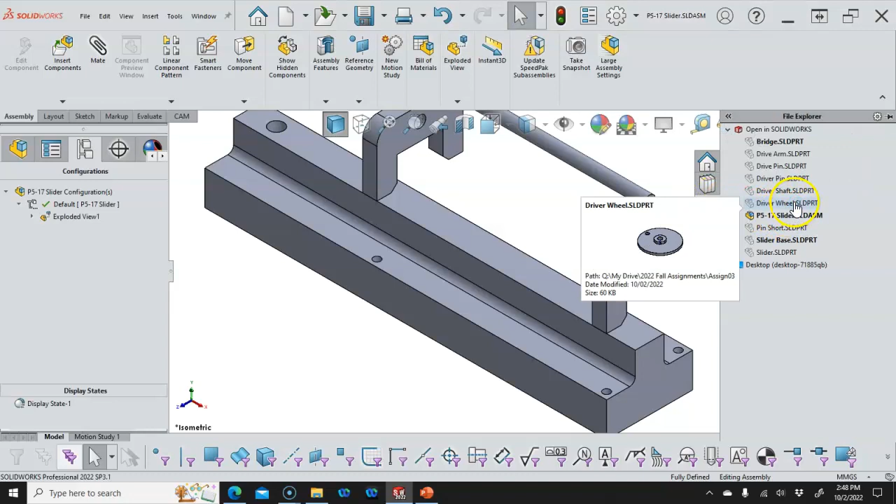Let's see if we can go pin short. Will it drag in? That looks like it grabbed a little bit of everything, so be careful with those. Yeah, no, I grabbed everything.

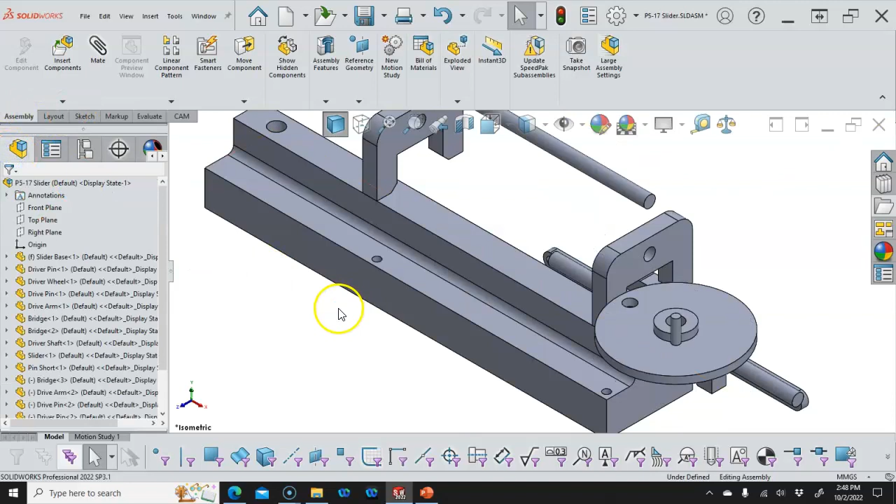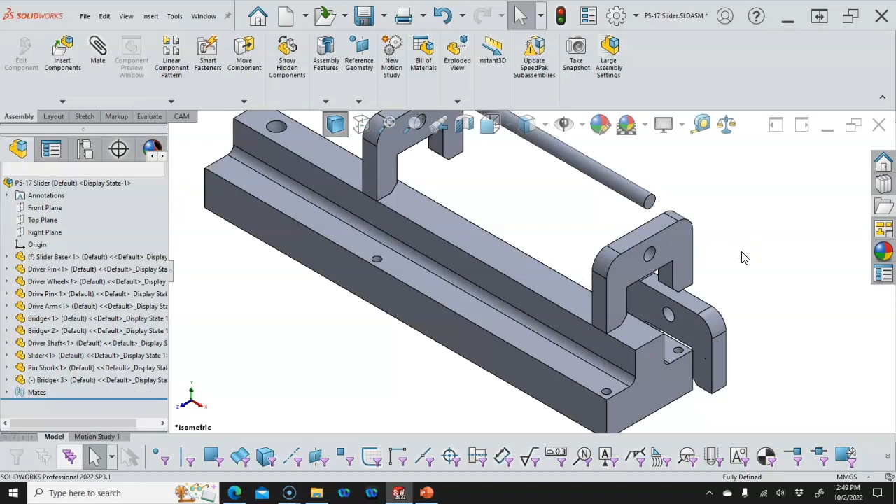So I'm going to try control Z, and we'll walk back out of this. But it brought everything in its created state, so at least that much is visible.

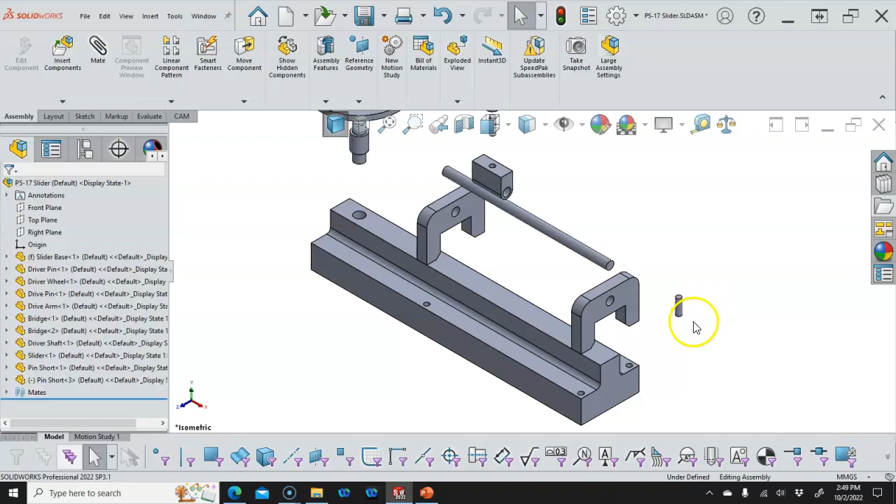All right, we'll try that again. So if you're in the open, and when all I did, well, no, everything blinks, so I'm going to try one more time. Okay, so even though it's not open active, it is active in memory.

So we'll go concentric and distance. So we made those 5 deep, so it should be, and that's still going to be the issue when we look at

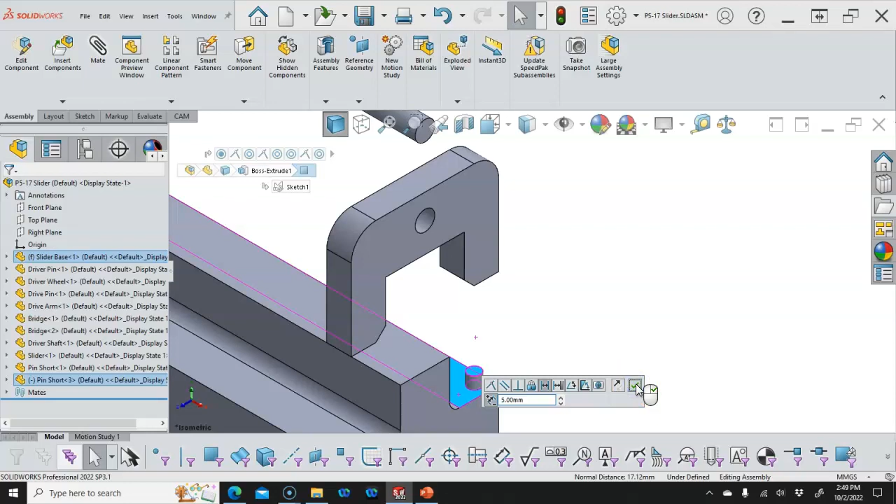this guy. All right, so from here, let's. Well, that one was actually 10 millimeter, wasn't it?

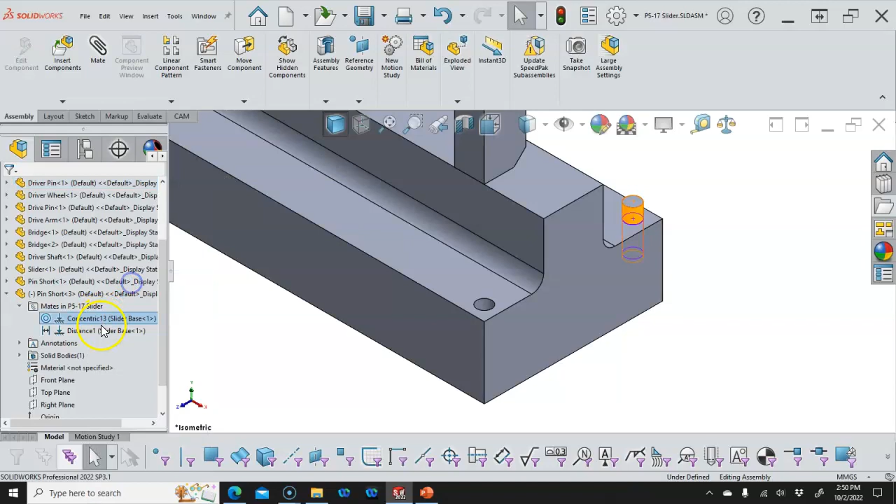So let's go back into the mates, and I will lock the rotation. Should be able to double click. If I can see the distance. No. All right, we'll just edit the feature.

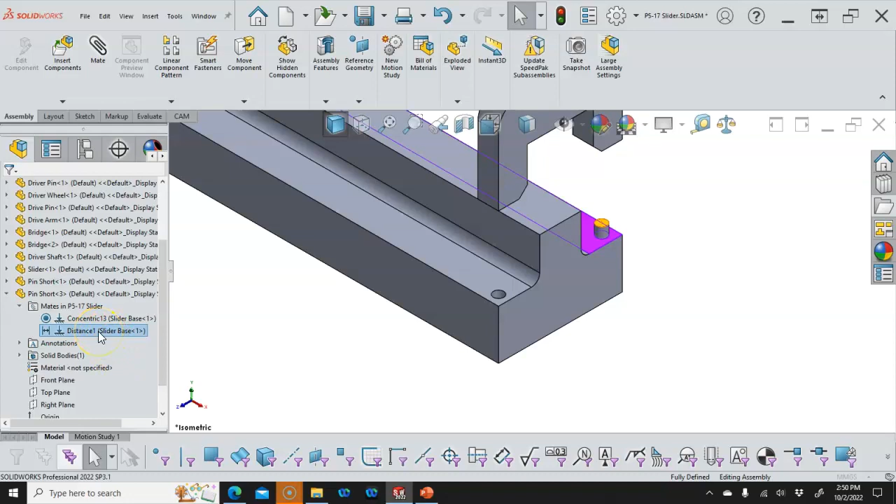And 8 will raise it up a little bit, it being 10 deep.

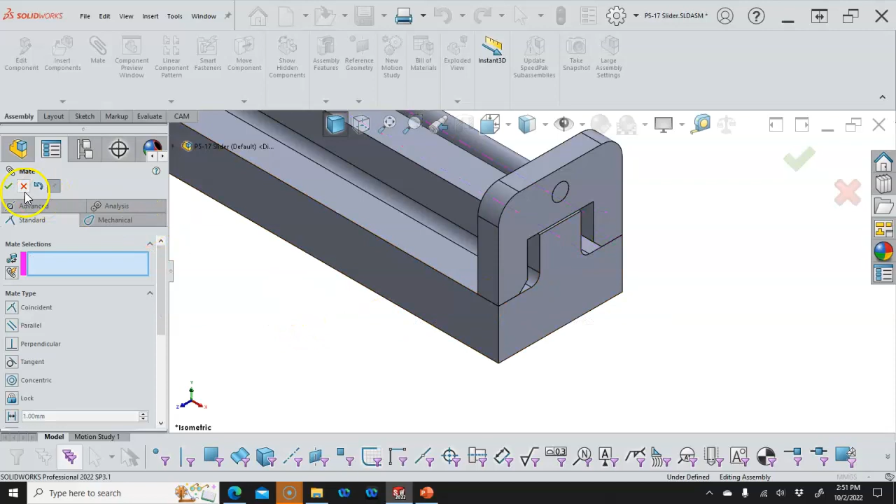All right, so the exploded view went away for the mate. Let's see if it stays. All right, well, a little easier, but we're not always going to have an exploded view to work from, and I don't know that that is the safest.

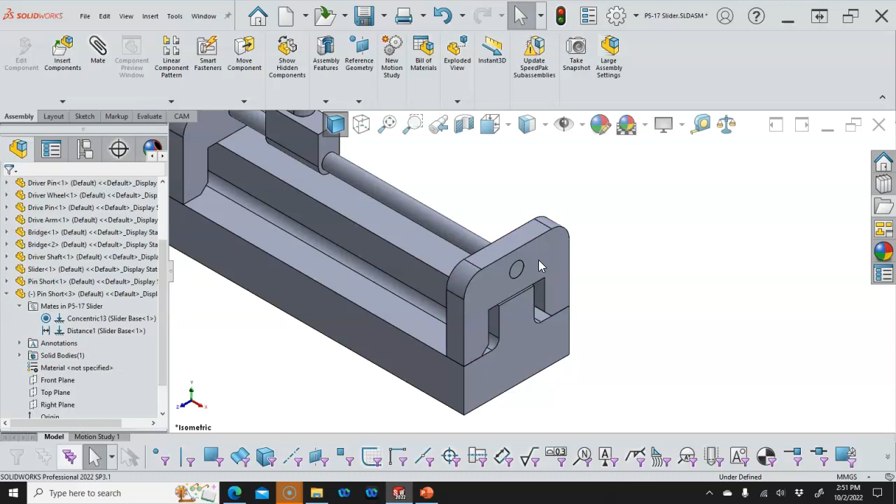So what we can do is hover the mouse over top of the part, hit tab, and if you want to bring it back, then it is shift tab on the keyboard. So tab, shift tab, tab, and shift tab.

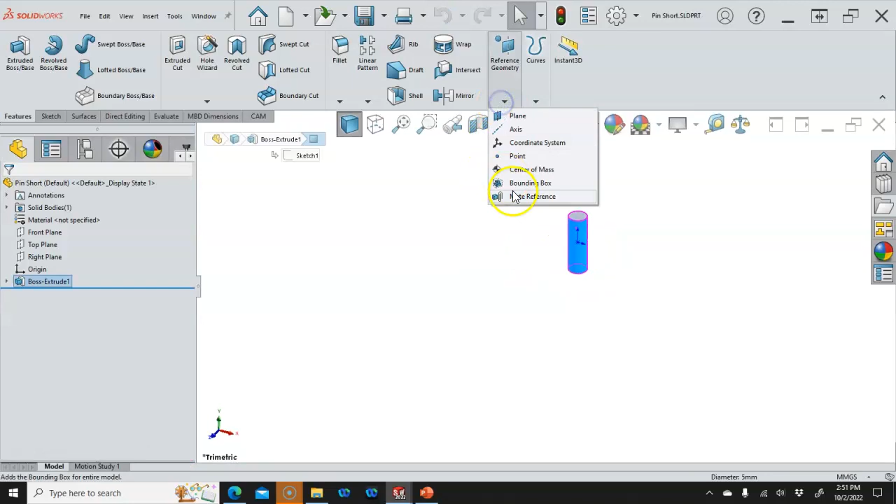All right, and then I would like to go ahead and open that one. We'll open up the pin, and instead of grabbing the edge for this mate reference, I'm just going to use the cylinder.

And not tangency, we'll go concentric and any orientation. So when I drag in from the work area to the next one, it should snap.

Okay, so it's there, it's just above it, and then if I hit tab, it's going to reverse. So if I let go, I let go of the control too soon. So let's try that again. I'll let go of the mouse button. Okay, so there's the lock rotation.

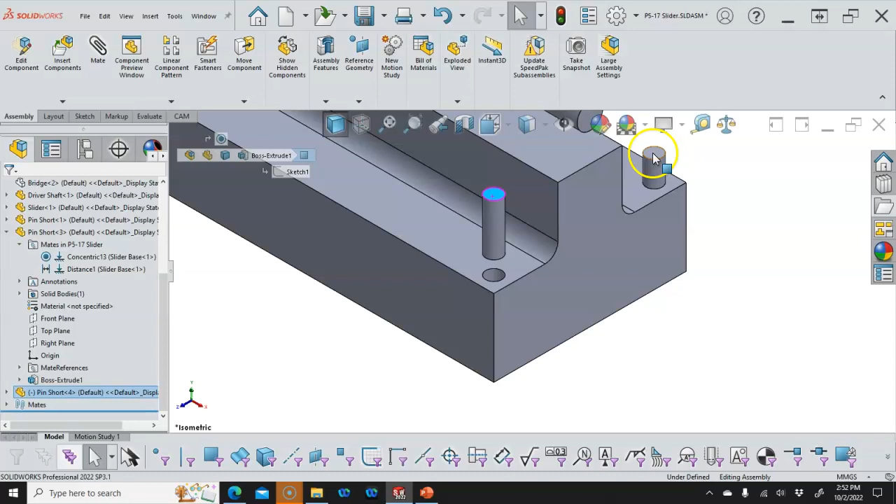It's fine. And then I would like one controlling the distance, so I'm going to make those coincident so that any of the changes I need to make will go into that one. So drag and drop.

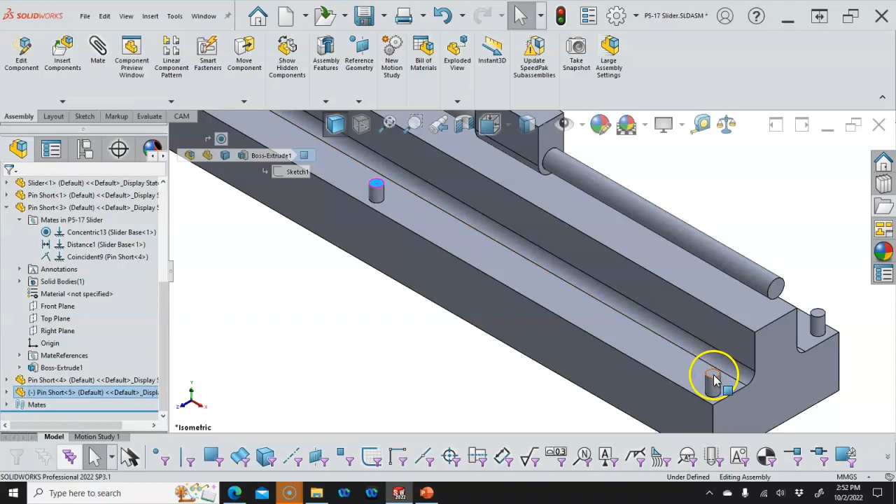We'll click the lock rotation, hit OK, grab the top faces and make those coincident. Rotate around, and one more.

Now this isn't going to be in the, there it goes. Got to wait for it to show the symbols. Lock the rotation, okay.

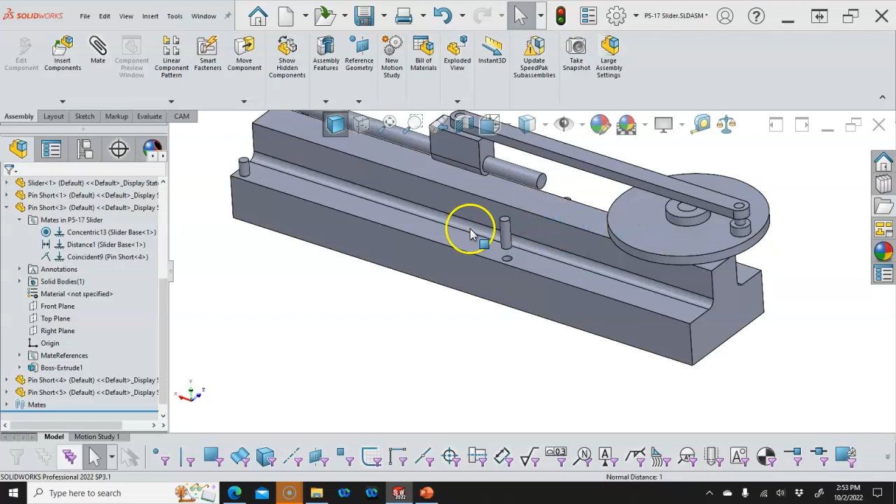So this isn't going to be participating in the explode because I just added them, so that goes to coincident. And we'll do the shift and tab in the general area, and shift and tab. So if there's nothing there, I think it just ignores it.

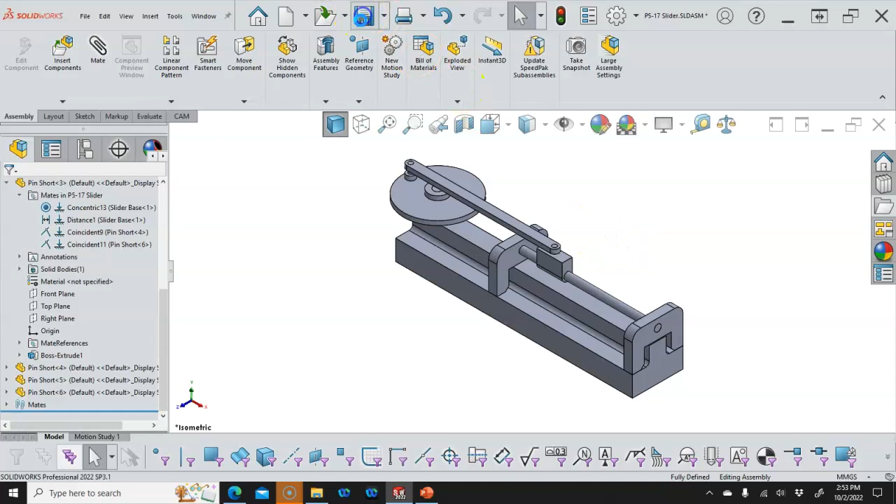So exploded view, and then we want to edit the feature, and we'll just go ahead and add those separately. I'm not going to try and add them to the spacing.

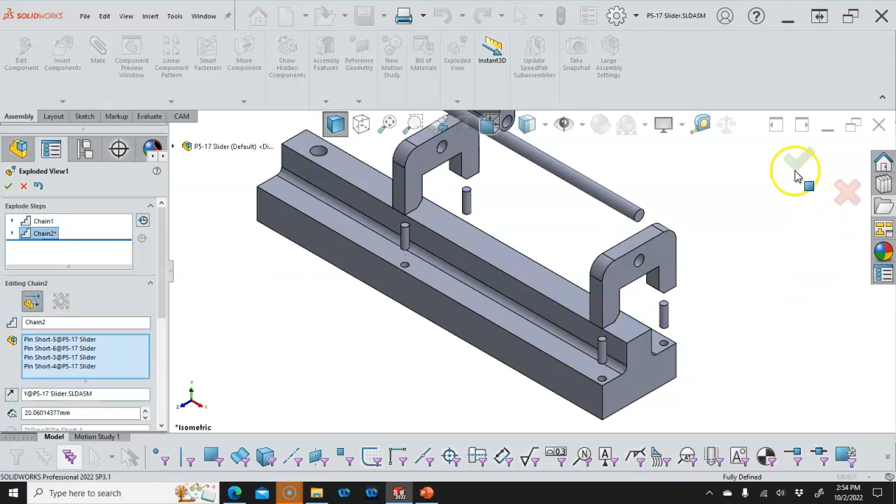And I could delete the spacing and add them all at the same time, but I don't think that's going to be any advantage to that either. So, all right, make sure to save that. So now we have two chains, and we're ready to go into the drawing.

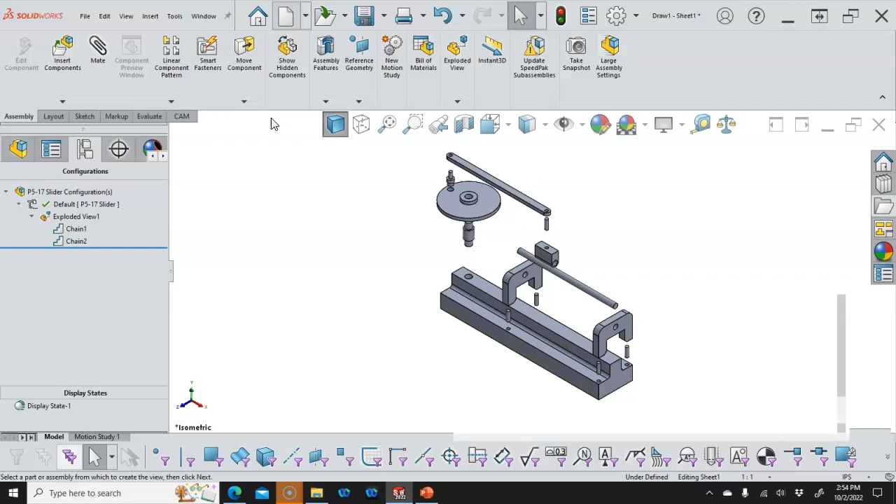So we've, let's see, I've used a couple different, so whichever drawing template you want to work with. I've kind of made two or three and I've lost track, so I'm going to have to do a little cleanup.

So the slider, and we'll make sure all that looks good. The arrow over, show an exploded state, the isometric, and hidden lines removed.

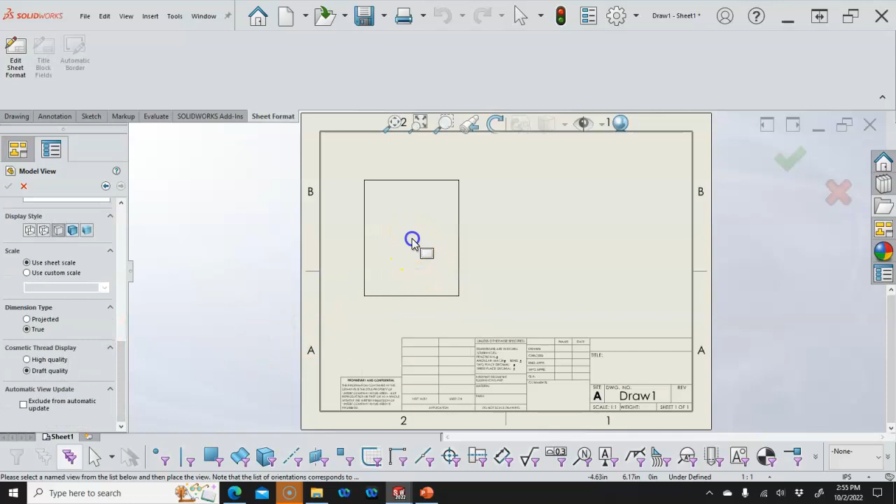All right, so we put that in place, and then the choice is to Control C and Control V, which is going to duplicate the exploded view, and we have to check it, uncheck the show an exploded state, and we're at 1 to 5.

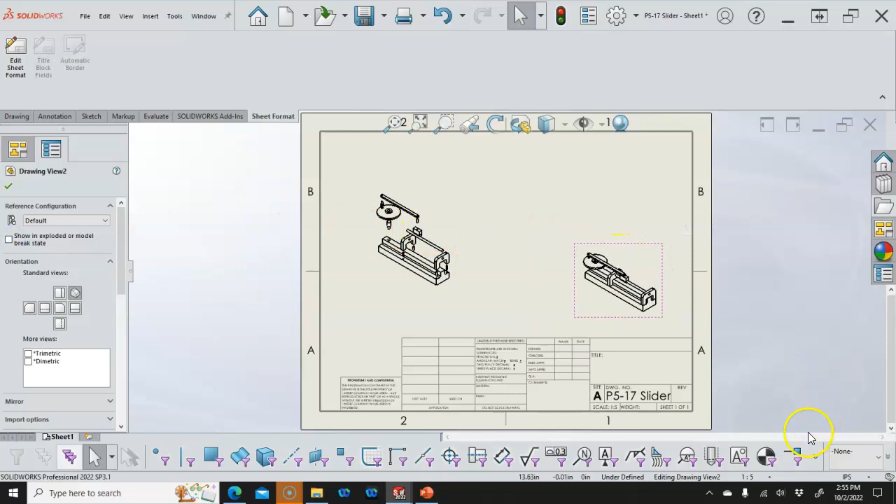It could probably be a little bit bigger than that, so if we go into the user defined, let's go to 1 to 3. So that doesn't look too bad.

And if I had wanted to bring in just the isometric view not exploded, we can pick out of the view palette, and it's thinking about something.

And once I can identify the isometric, I could have just dragged it into the work area.

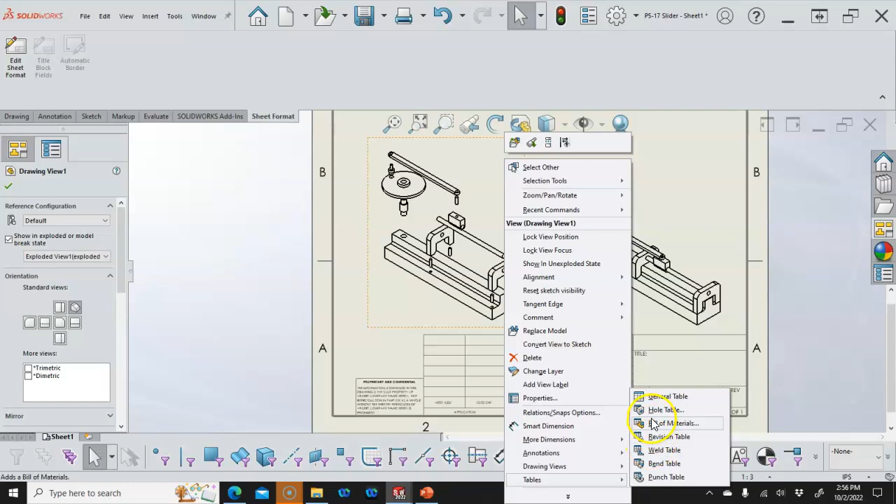If I had just created the bill of materials and not put those additional pins in, I would have probably caught it then. There's a lot of error checking going on, and each iteration is looking it over to see what's working and what needs to be improved.

So I'm going to delete the column. We'll move that over, and then I can position it. All right, so between the scaling and being able to create the table...

If we'd use the other one, maybe I'll go find that. Let's do properties. So I picked a format. Let's see, my A landscape, if I apply the changes.

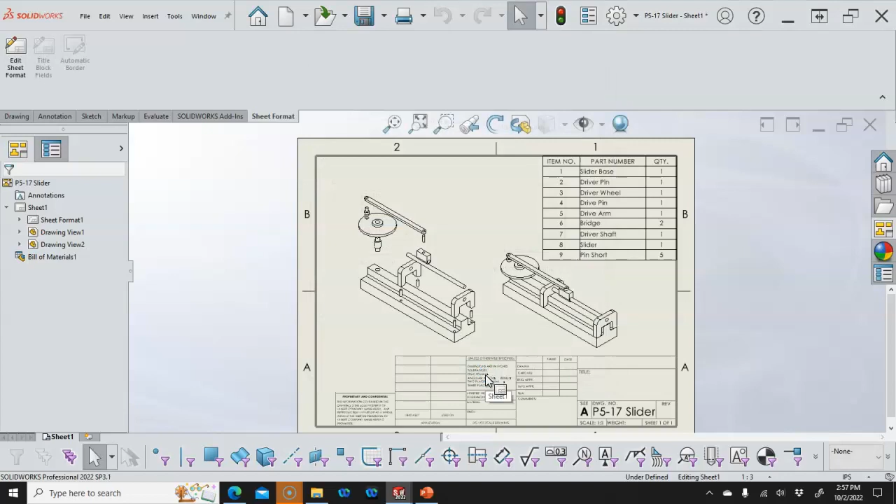Nope, still not there. So we can go back into the properties, and since it did not show up, we'll browse.

Get back over to my system file. So this is going to be the downside to having a few things over the drive, keeping track of where I put it. Okay, so the templates.

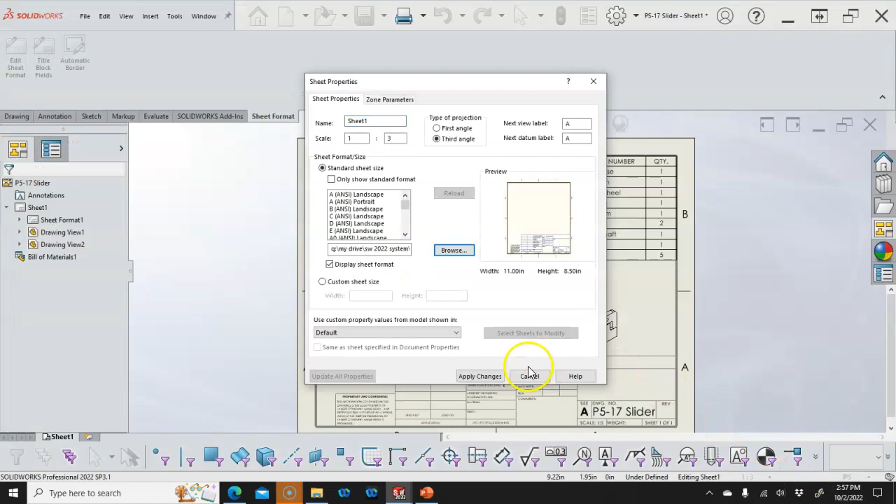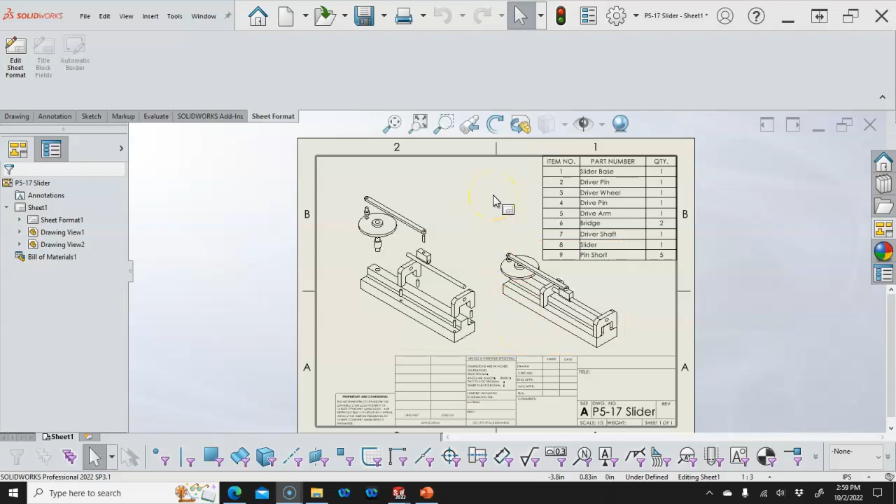It doesn't look like I'm going to get a preview there. So I guess it would help if I'd actually created that template on this computer. Anyway, we're going to stay with the A landscape, and we'll do a modification and start working on the templates next.

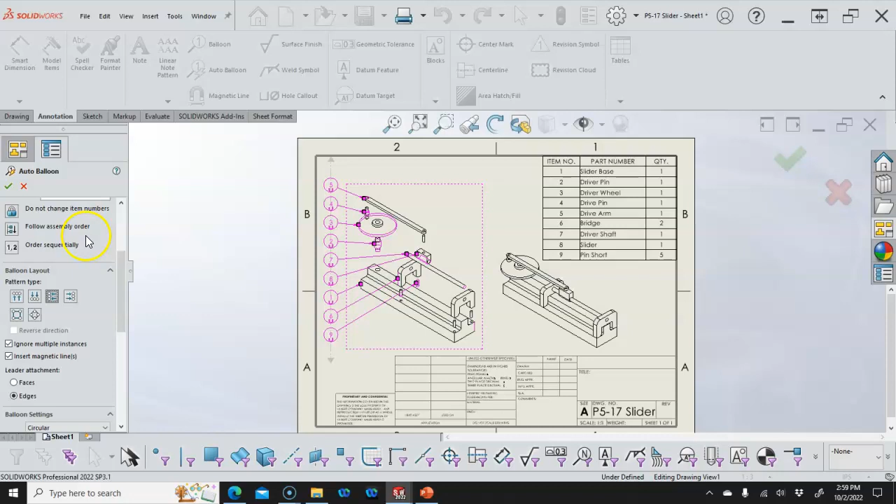All right, so the last thing we need to do here is—there's a couple different ways, I guess the takeaway from all that is there's a couple different ways to point to the templates, but the biggest thing is keeping them organized. So I'm going to load all of the bill of materials items to the left.

And that doesn't look too bad. There's a few things crossing over, maybe a little cleanup on that one. And everything else looks all right.

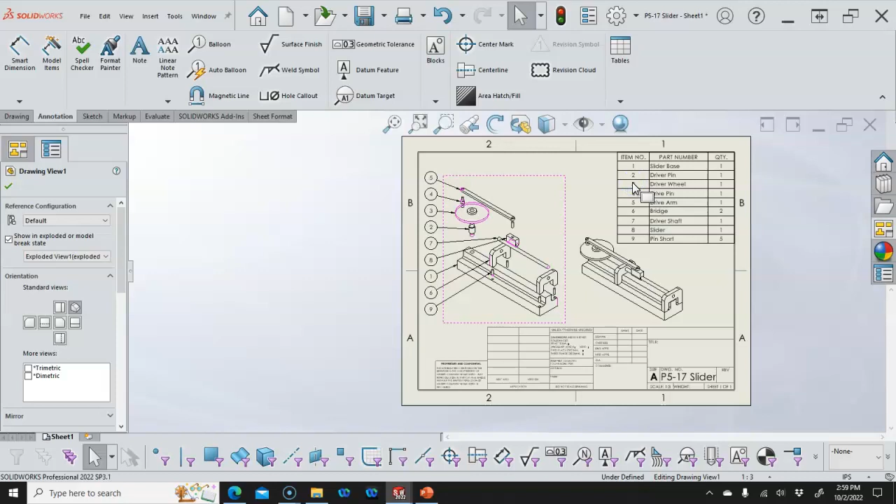Okay, so at this point you have to make the decision. Are we staying with the drawing package, or are we going with individual parts?

If we're doing individual, I save this as the assembly drawing, and then I open up the next template, bring in the part, and repeat the process. So if I'm going for the multi-sheet drawing, now I can add the sheets.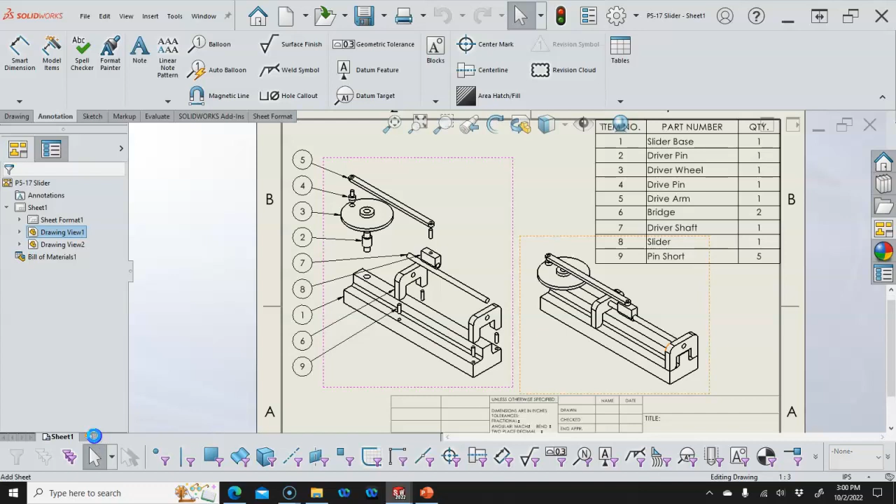And the first part that we'll bring in, let's do the view palette. And I want the base. And pretty much the process is going to be to add the sheets.

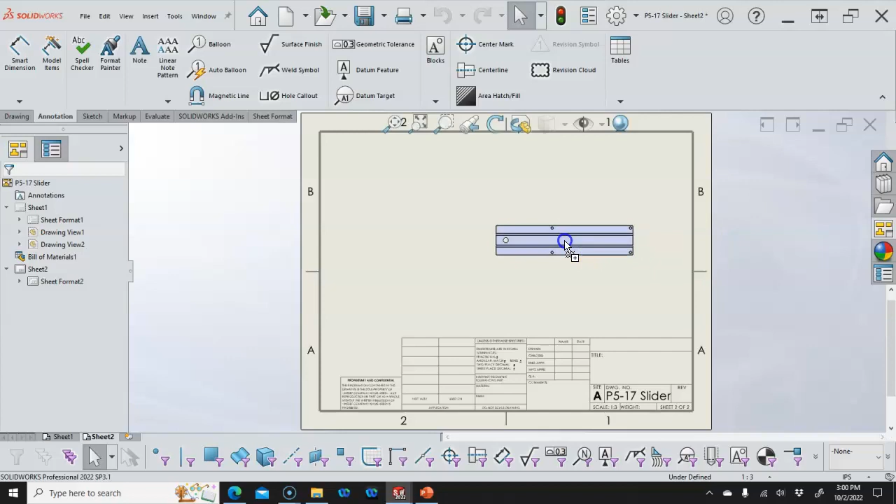And especially with this, probably going to get close to what, 10 or 11 sheets here. And we'll apply that one.

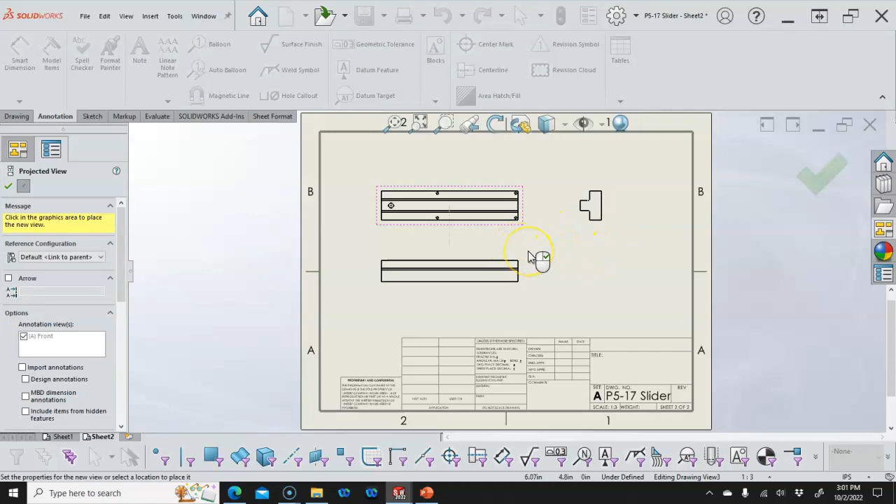And that actually became the bottom view, so I don't know that that was really what I wanted. That will probably make it more confusing, not less confusing, so I can always delete that. And with that view highlighted, we'll go back into the drawing and pick the projected view.

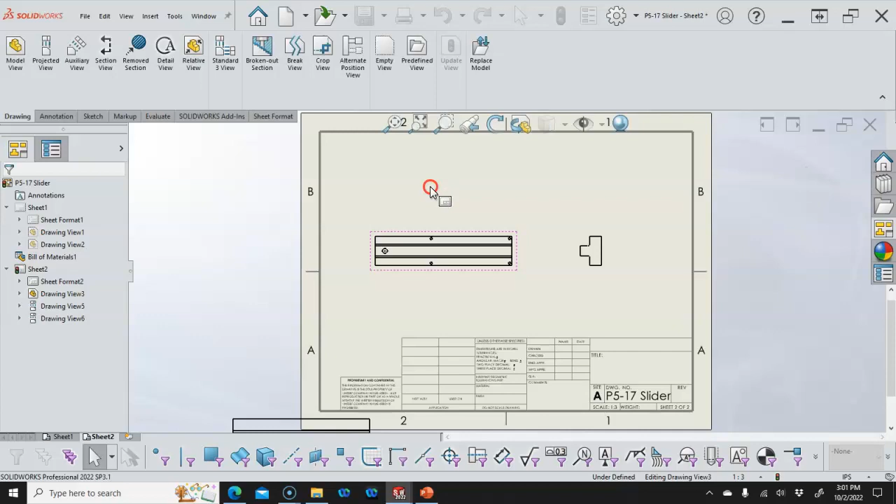And it put it in, but not sure why it put it down there. Okay, so that was weird. I'm going to get rid of that one, and we'll come back and revisit that one. That was kind of strange.

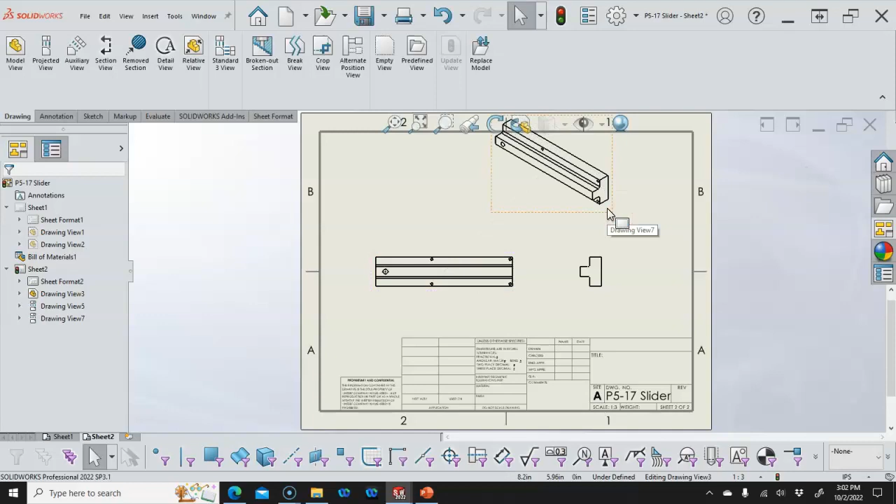So if I do the projected view, at the very least, we'll bring in the isometric and get it positioned. All right, so next sheet.

And we'll just try to use both of these, the model view and the view palette. So you'll kind of get to where you have one that you prefer. And so the driver pin.

Now if we put more than, then that makes it maybe a little more confusing. So I do want to decide if it's worthwhile to have, to try and make use of those.

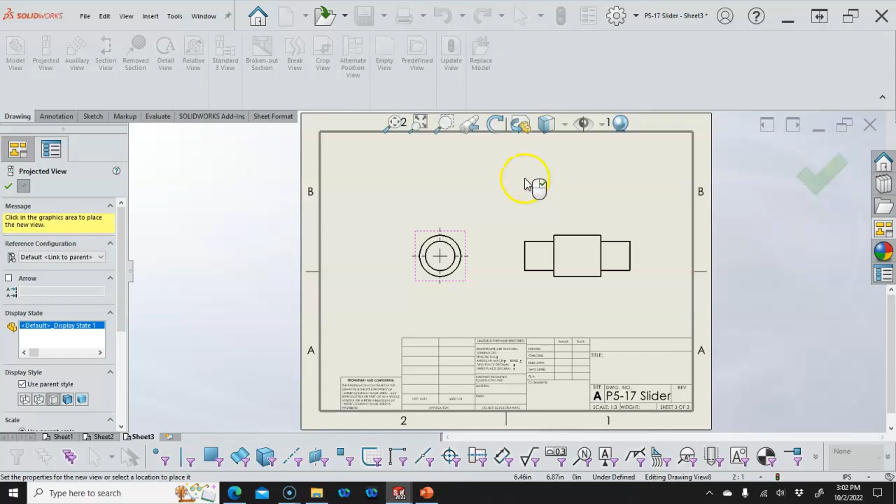Probably have to add some notes to further define which parts are which, because the title block's really not going to help us out there.

All right, so other than the scale, yeah, 2:1 is not bad on that. And then we'll bring in the wheel.

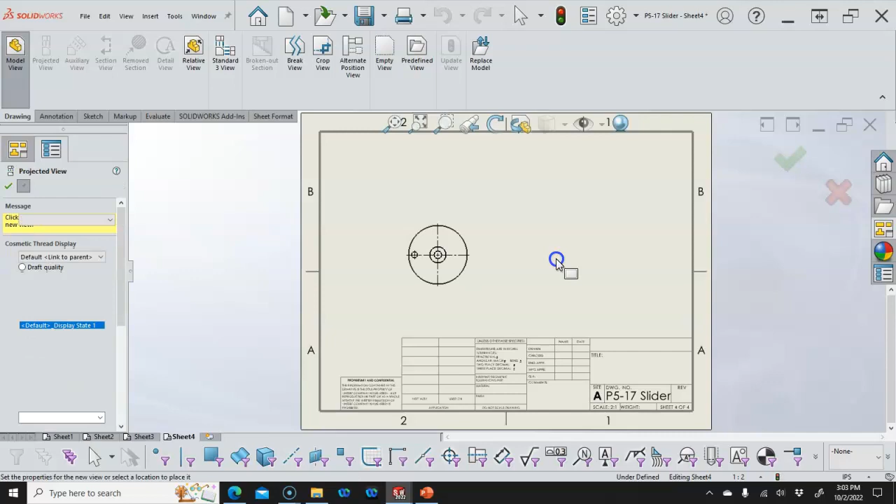And the driver wheel. And while it's thinking, let's just go ahead to the top view. And we'll bring out the side view. And then an isometric view.

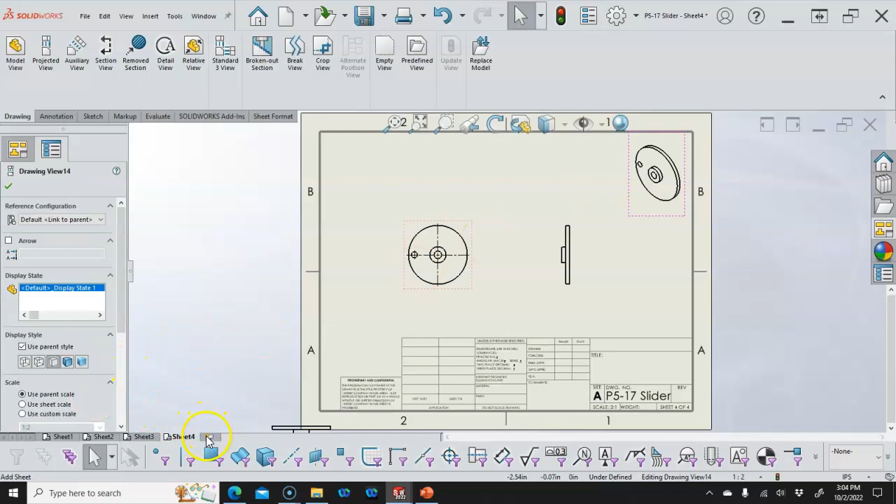And okay, and then position. And again, I'm trying to use this as a roadmap, as the geometry that—when we go through the assembly, this would be the assembly order, or something close to it.

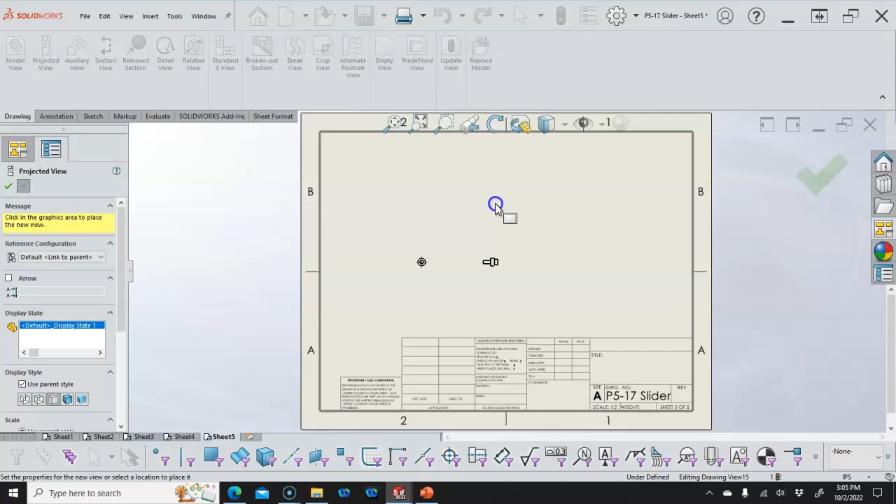Okay, and then the drive pin. Okay, so since the computer is still lagging, I'm going to go ahead and pause and finish out the sheets, and then we'll come back and start adding dimensions.

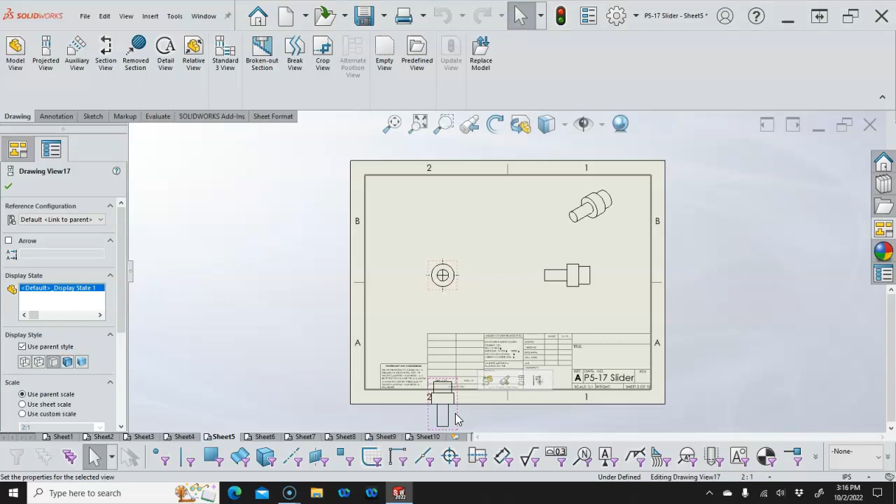Okay, so I went through and added the views. Notice that in getting a little button happy, I added extra views, so we'll just highlight that and delete it. And the scale looks okay for that one.

We'll just go through the sheets and give them a once over. So that's a little on the small side. I don't know, 1:1 might be...

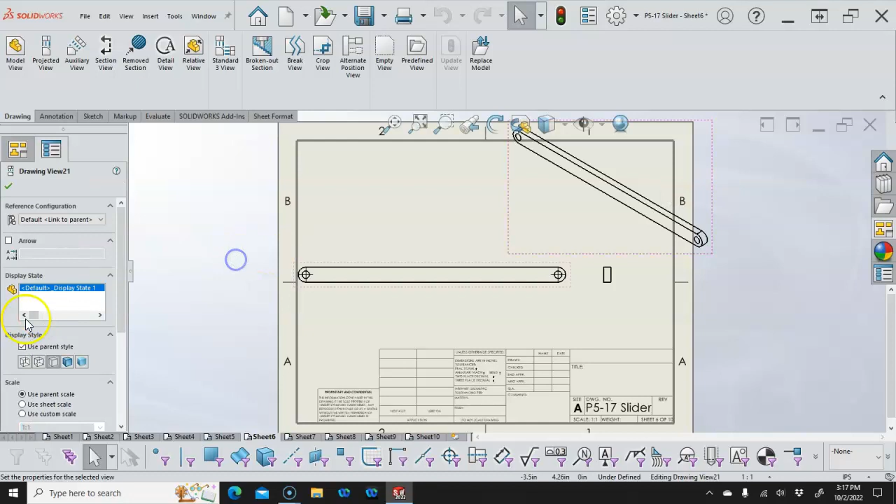...a little too big, well, especially for the isometric view. So if we go back to the custom scale, at the very least we'll do half scale for it. And that might be a good place to try the break view if we don't run into any issues.

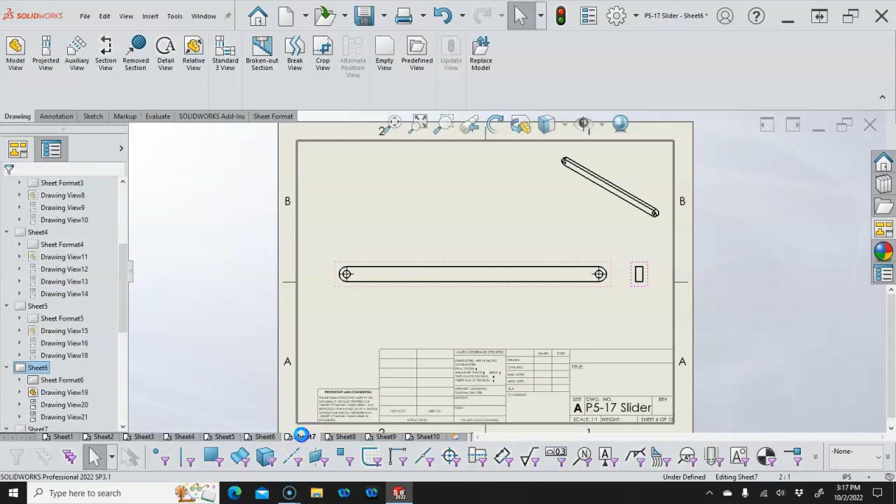And the pin, and that's already 2:1. And then the bridge looks pretty good.

So on this view, I brought it in, but I don't really like the way it's aligned, so I'd like to look at it from the top. And then we have the ability to get all of the geometry in, so let's go ahead and make it a little bit bigger, like the 2:1.

And the isometric, again, maybe not so much 2:1. Use the custom scale, go back to 1:1. So that looks pretty good.

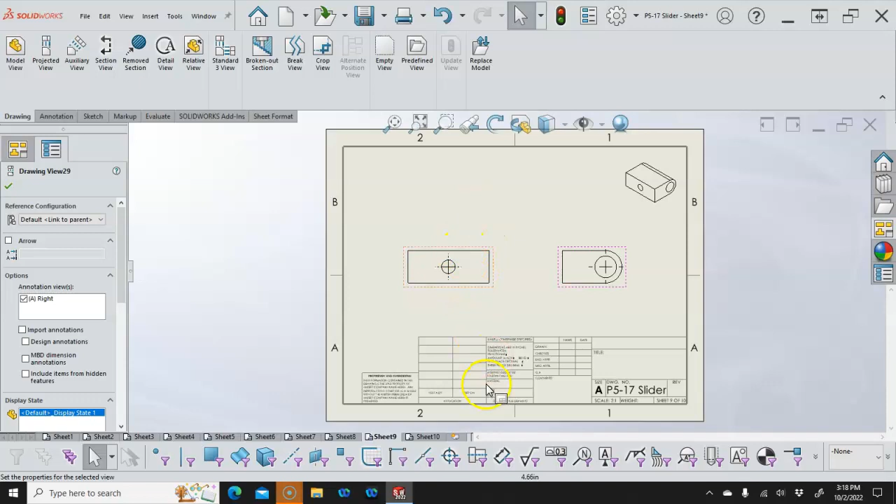There's nothing really, if in this case from this side that would help us. And then, again, that's a little bit on the large side. And so just view how easy it is to read - that's kind of what we're gauging on here.

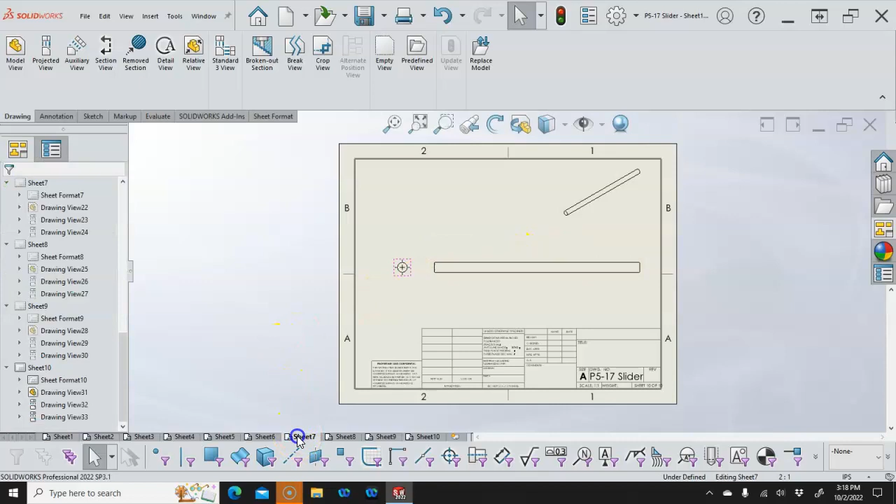If I move the front view up, and then let's jump back over to the arm, whichever one that was. And we'll zoom up a little bit and highlighting that view.

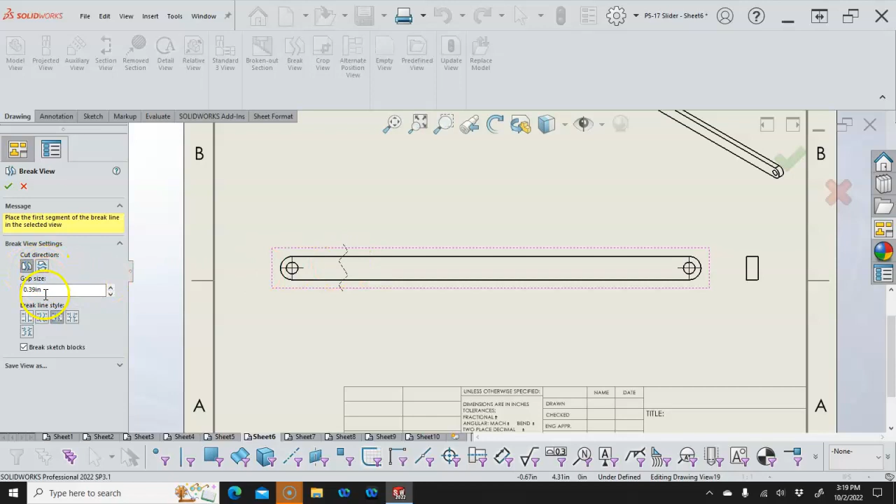And if I go into the break, then I have a vertical break. Those are the different styles. So the cut direction is the gap, the size, 10mm gap size. And then how do we want it to look? The wavy.

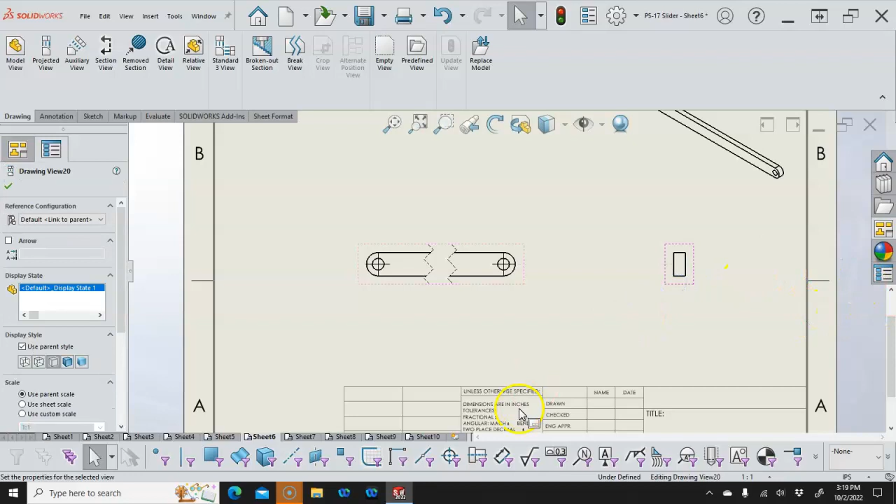So we can put those in as a break view. And the side view can come in. It just opens up more space, kind of cleans up the view, and there's no geometry, and it gives us a chance to practice those.

So we have the view, and we can place the second one and hit OK.

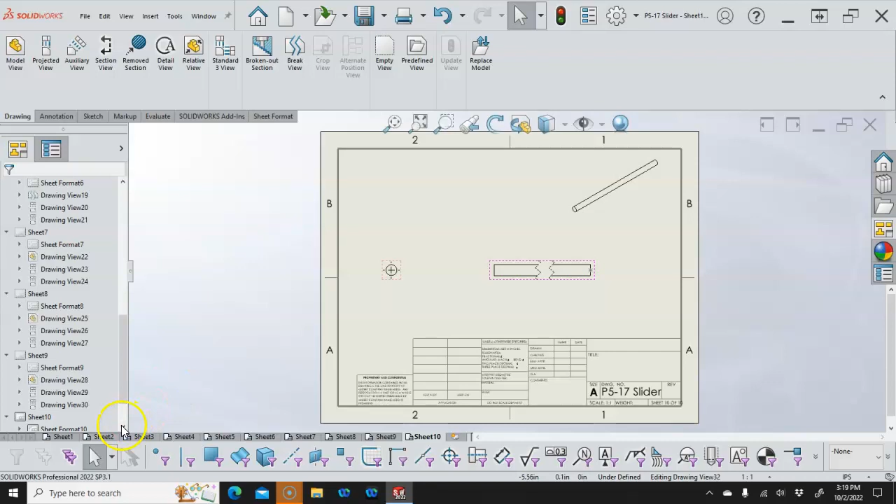All right, so for our dimensioning pass, pretty much going to do the same thing. We'll dimension a few of these, get a sense of how it's going to work, and then we'll come back from there. So the side view

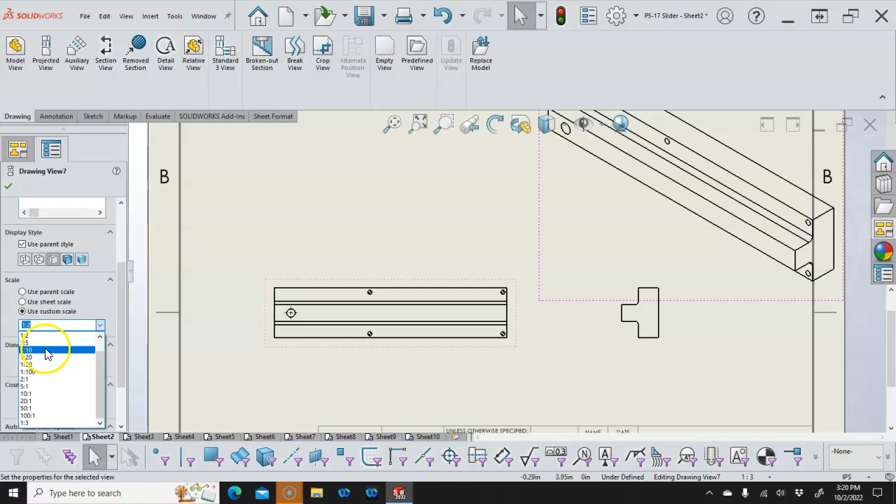from the front and back, I can't think of any geometry that we need to have there. So looking back at this one, we'll go into the custom scale, make it a little bit smaller, 1:5.

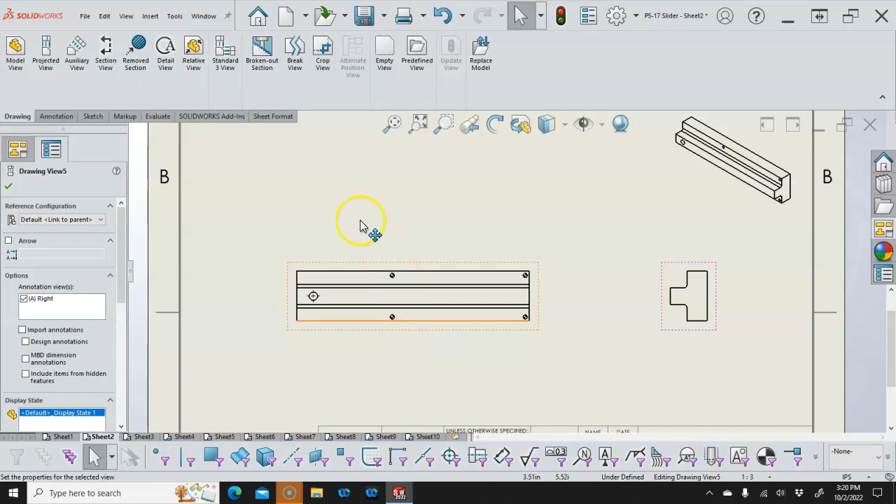And then we have to decide, are we going to do baseline, ordinate. If I do ordinate, I'm pretty much going to do ordinate throughout the entire drawing package. I don't like shifting back and forth. So let's go ahead and set up for our dimensioning.

We'll do the smart dimension, and we'll start adding geometry. Okay, and then those are the dowel pin holes.

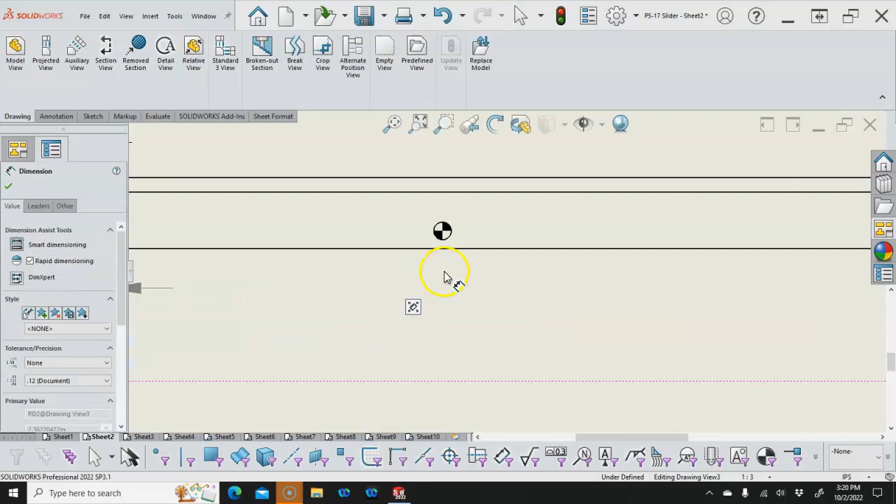Well, so let's make sure that those get highlighted. And I'm still in 2 decimal place, so probably want a little more tolerance than that.

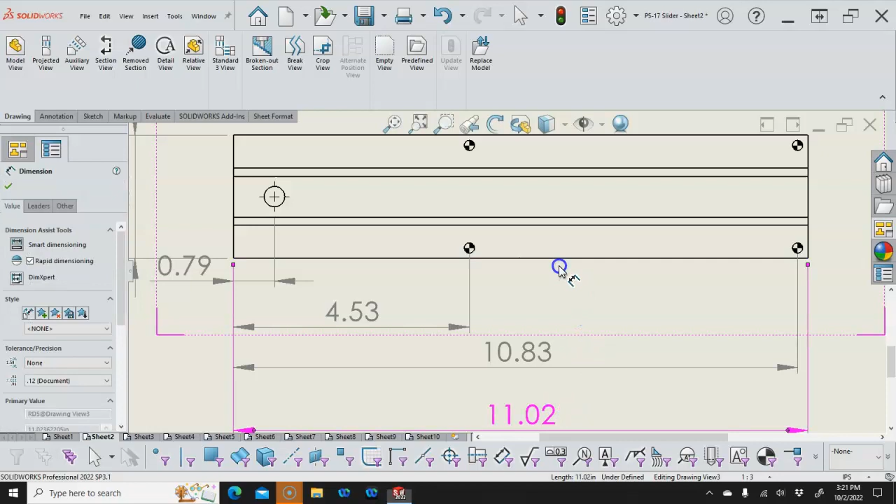And then the overall. Okay, and then we can go back and start looking at the heights. So just doing something fairly simple like this, you can kind of see the advantage of what happens with the ordinate dimensions.

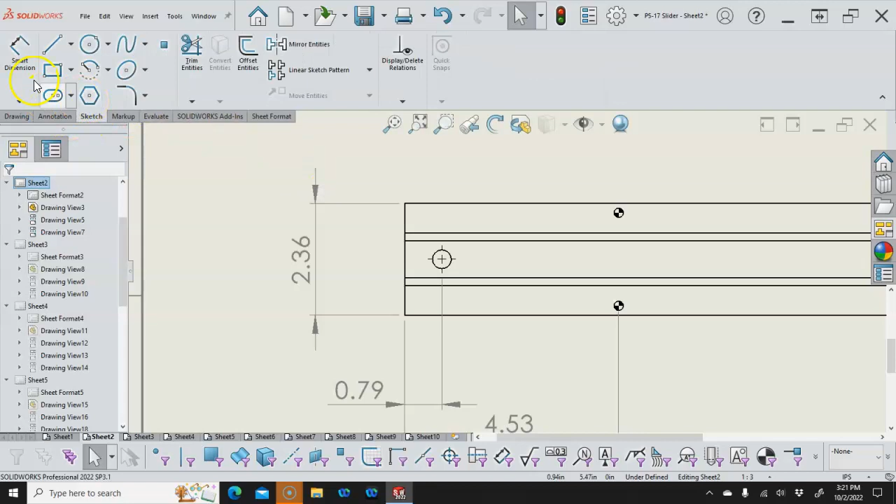I'm not sure what that one grabbed. Oh, I didn't get the second line to it. Okay, now it kicked me out of the smart dimension, so I'll try that again.

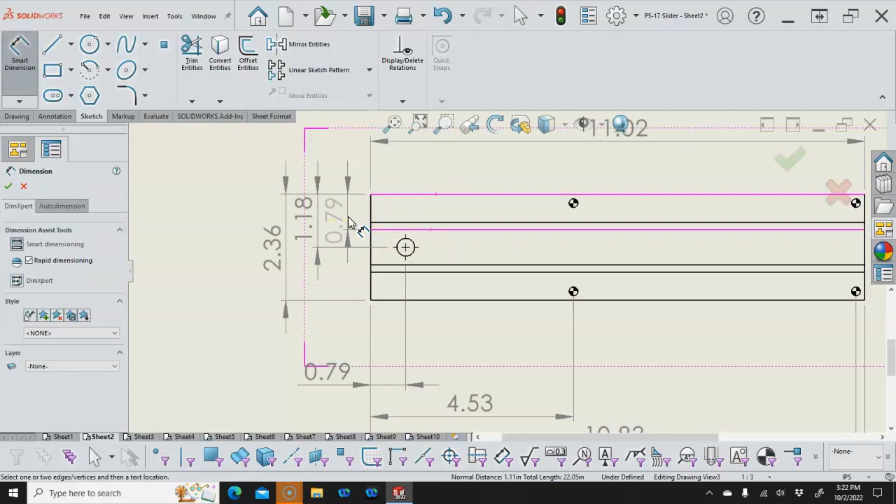And with the rapid dimensioning, I want to make sure that I'm getting the right line selected. So let's escape, and we'll move that out a little ways.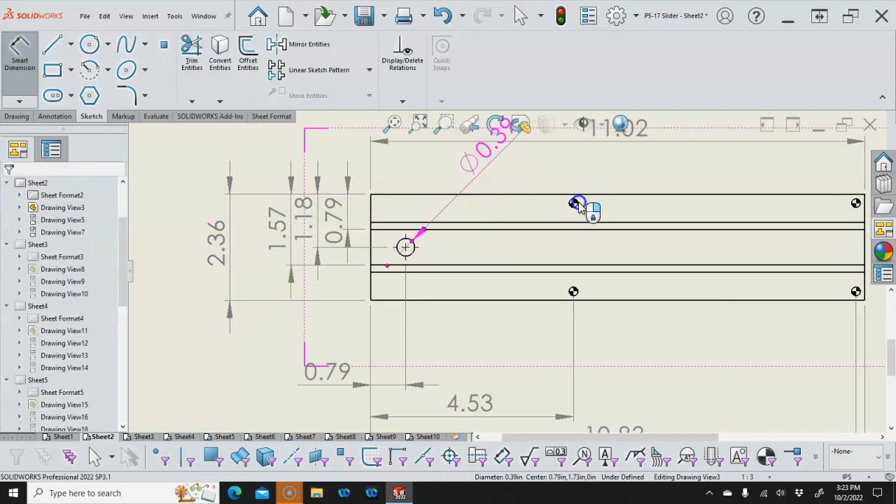All right, so for the geometry, for the radius, and because those were hole wizard, let's get rid of the second instance of that.

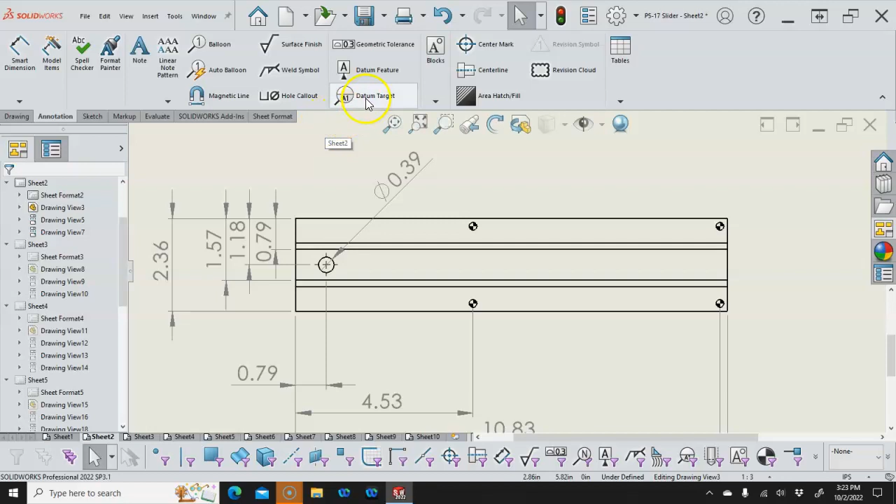All right, so those were the hole wizard, and so I go back and forth on the dowel symbols, you know, as far as being more or less useful in the drawing.

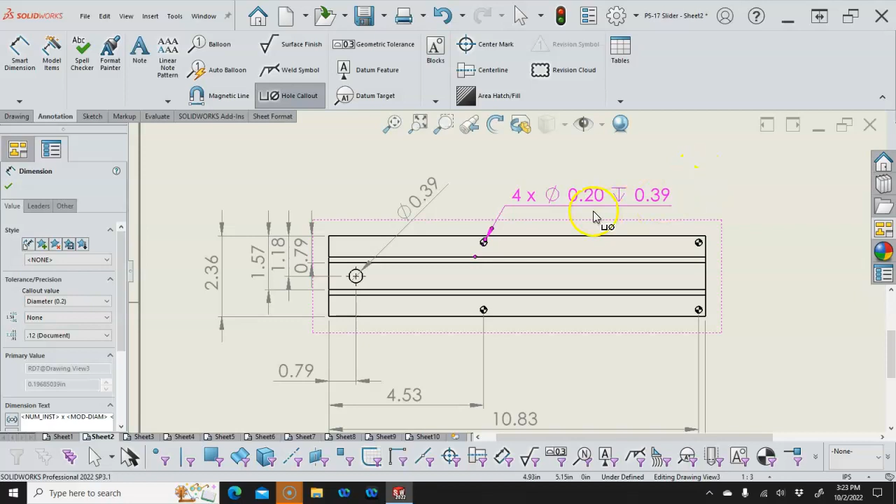So because of the hole wizard, we can go to the hole callout. It's going to be a little bit different, but it has both the quantity, the diameter, and the depth, where this one would be pretty much through.

And we might be able to see that. So this might be one of those places that turning on the hidden lines visible would help, but really it's a matter of making sure that the symbol and the notation is consistent.

So let's go through and reposition that a little bit closer.

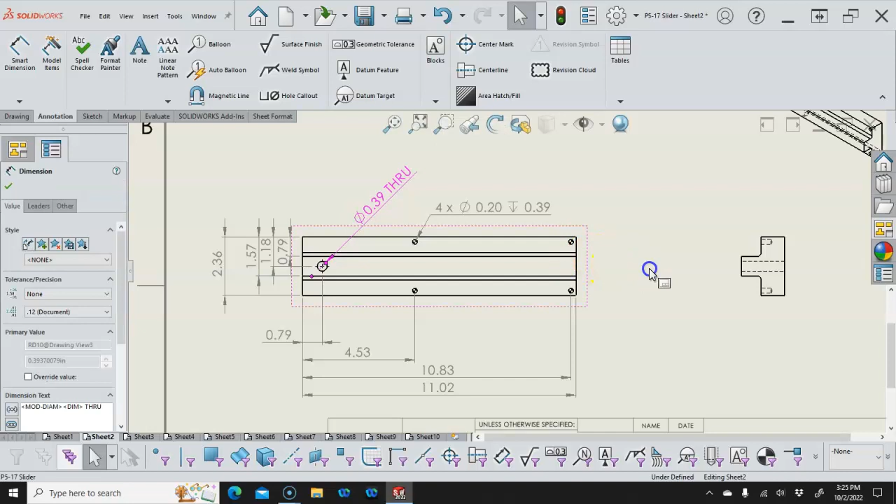All right, and then we can focus on the side. So this is a little more maybe in depth than what I'm really expecting for the assignment, but we need to start working towards that process where you're looking at putting everything dimension-wise that you need to make this part.

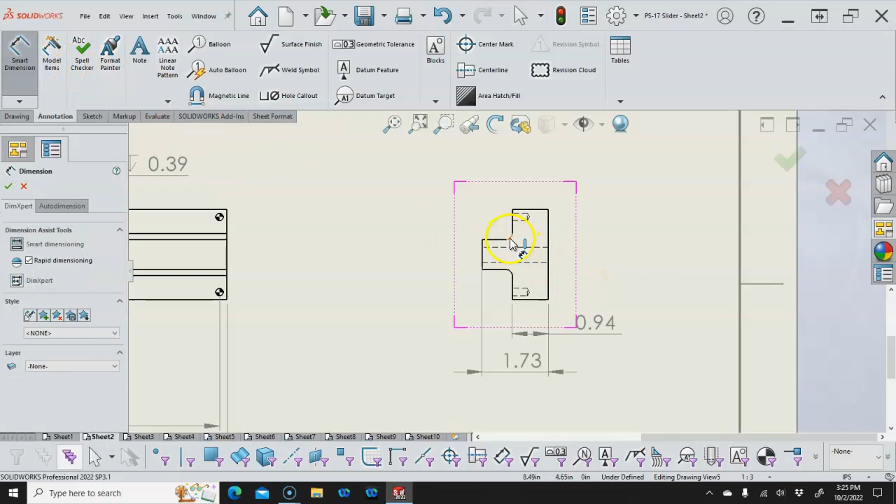All right, so that can go out. And last one will be the radius, and don't like the directions, so we click on the handle, and that will reverse it.

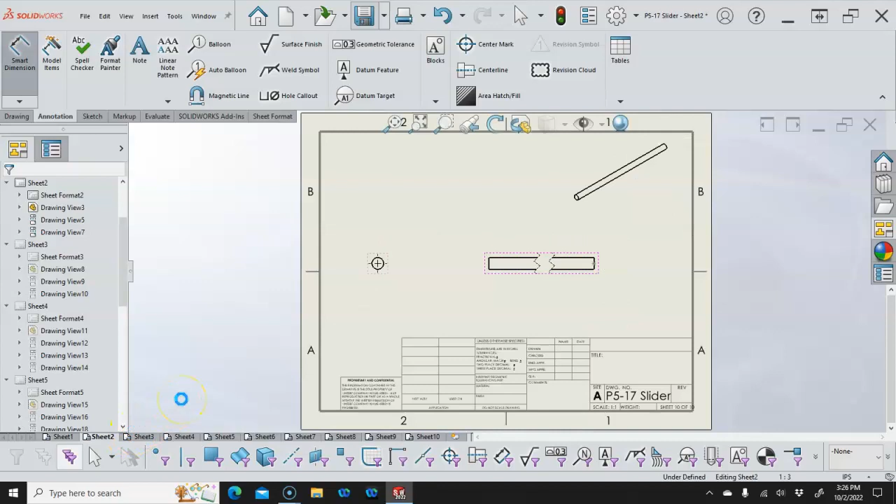And make sure to save. Alright, so again, since the computer's not responding super fast, I'm going to go ahead and pause. We'll take a look at the overall dimensioning scheme. Anything that comes up, we'll put into the next video.